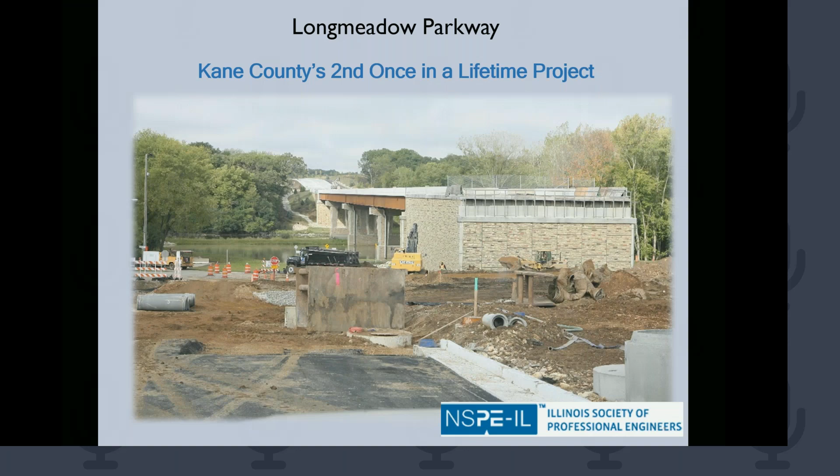Our topic today is Longmeadow Parkway, Kane County's second once-in-a-lifetime project.

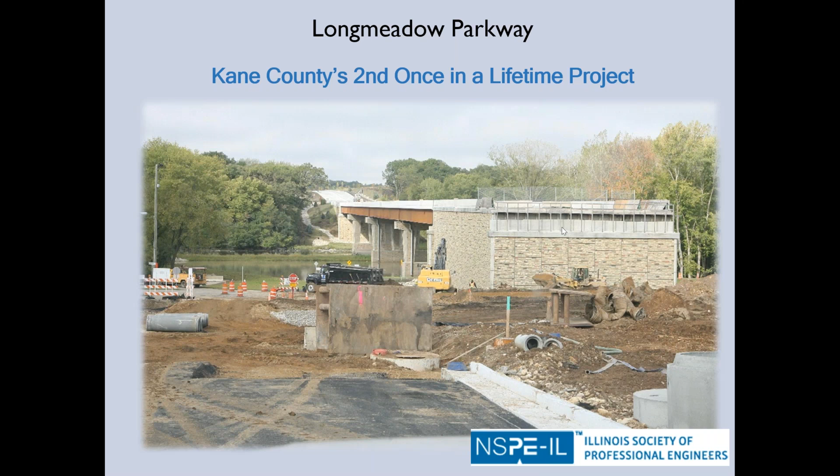Uh-oh. There we go. So this handsome gentleman that you're looking at here, oops, wow, who looks like he's running for president, is me.

I have about 35 years of professional experience, the last 24 of which has been at Kane County. And I've been in a leadership role at Kane County since about 2003. So in other words, I came in the middle of the Longmeadow Parkway project, sort of a relative newcomer.

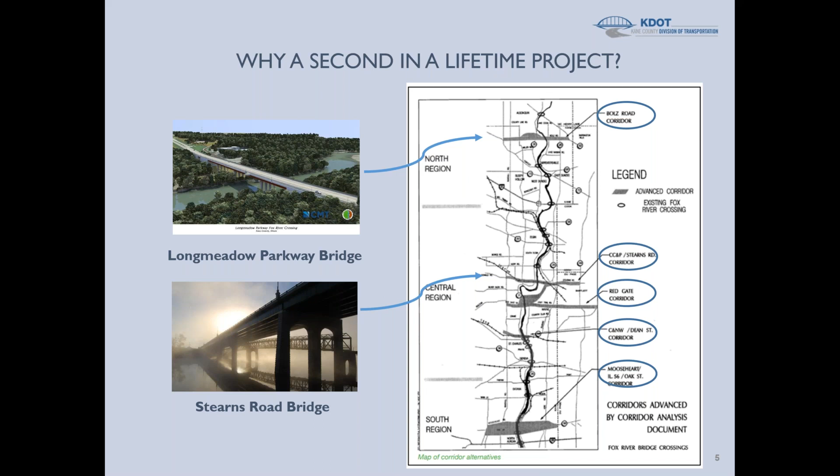As far as the 3 that surfaced out of the EIS, Kane County took the lead on 2 of the corridors, and that's Longmeadow Parkway and Stearns. The 3rd corridor was the Route 56 Oak Street corridor in North Aurora. And since that was basically a realignment of a state highway, we decided not to take on that one at that time.

So jumping back to Stearns a little bit, our first once-in-a-lifetime project that opened to traffic in 2010. I trained all my friends and colleagues to call it the award-winning Stearns Road project. It was unique in several ways. One is just the size and the scope of it, but also that something like 2/3 of the footprint was set aside for open space and environmental mitigation. So it was a very green corridor, and hence the color of the bridge that we chose.

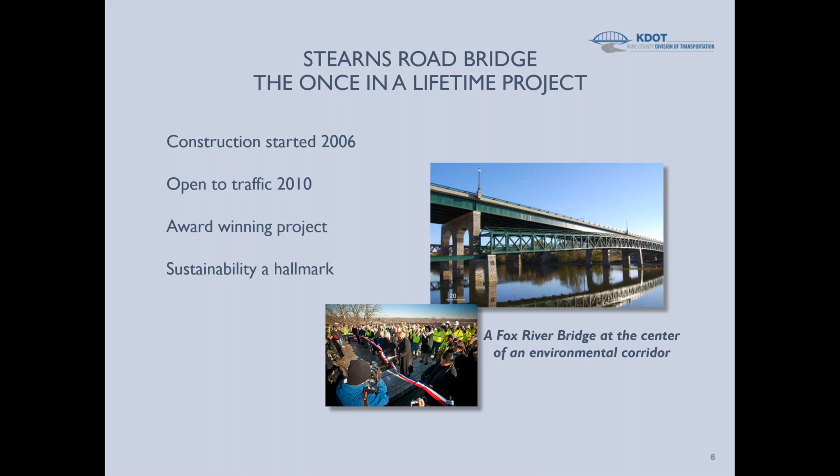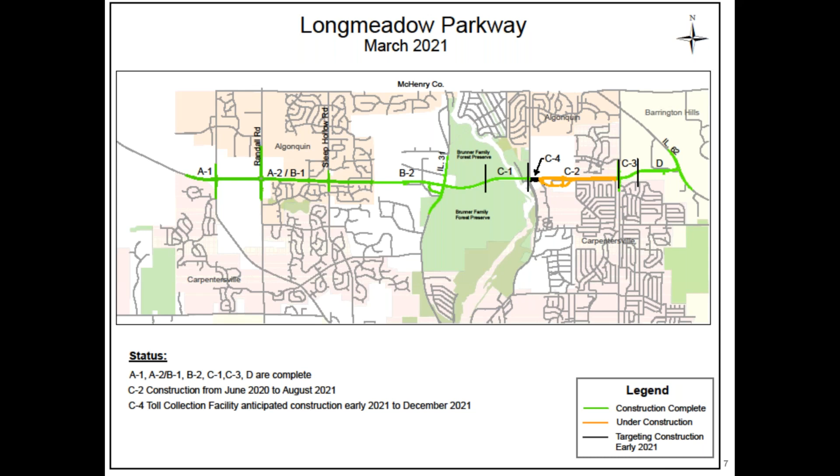All right, so back to Longmeadow Parkway. Here's a map of the entire corridor that I'll describe to you in a little bit more detail. Everything that you see in green is now complete, and everything that you see in orange is under construction. And then there's a small black piece there, item C4, which is the toll collection facility itself. So the gantries, the roadside equipment, and all of that infrastructure that's necessary to collect tolls will be the last piece that goes. That's actually been bid and awarded, and construction should start later this year. So we were advised to do that piece last because technology is changing, and so you want to take advantage of the latest technology.

So a little bit more detail about where we stand in the construction. In roughly 2016, we started construction on the far western edge of the corridor. That's what's labeled there as Section A1. We basically did that because the land acquisition was complete and we were able to move to construction. This is the only section of the corridor that we built as a 2-lane highway. The rest of the corridor moving east is 4-lane arterial with all turn lanes.

The reason that we built this as a smaller cross section is that this is largely open farm field actually, and just prime for development. It's right on the Randall Road corridor at the intersection with Longmeadow. And so our thought was that as development occurs there, it would be reasonable to expect a future developer to widen that highway to meet the direct needs of their development. So we built just a 2-lane section. The 2-lane connection is very important though, because it allows traffic coming from the west to connect easily into the corridor and just flow the next 5 miles or so across the river towards the east.

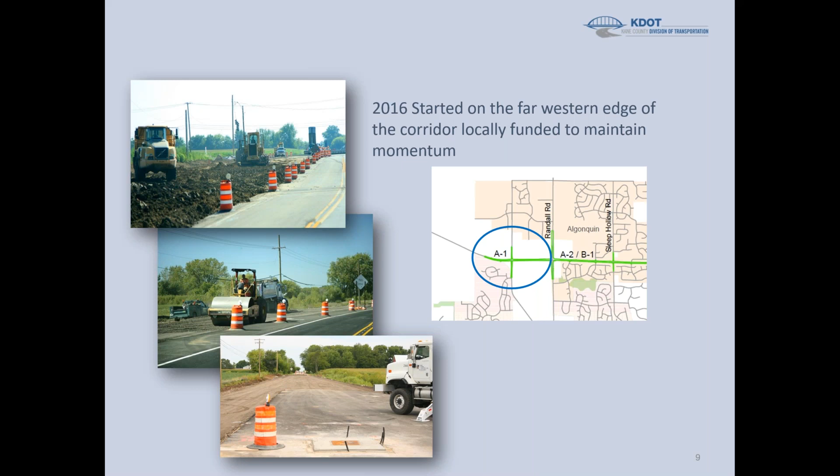So jumping forward, the next segment moving to the east, you see is labeled A2/B1. That one was built the following season, and in that area, the character of the land is mainly residential in nature. And this actually was sort of the heart of the organized opposition that I'll talk about later. But basically, people didn't want a new road in their backyard, and that was kind of the gist of the opposition. And then we just kind of started moving to the east.

Contract B2 there picks up where the other one left off and moves down the hill towards Illinois Route 31. And then contract C1, you see there, that's the section that actually includes the bridge over the Fox River. And that's largely complete, although it's not open to traffic because it really doesn't connect to anything on the east end of the project there.

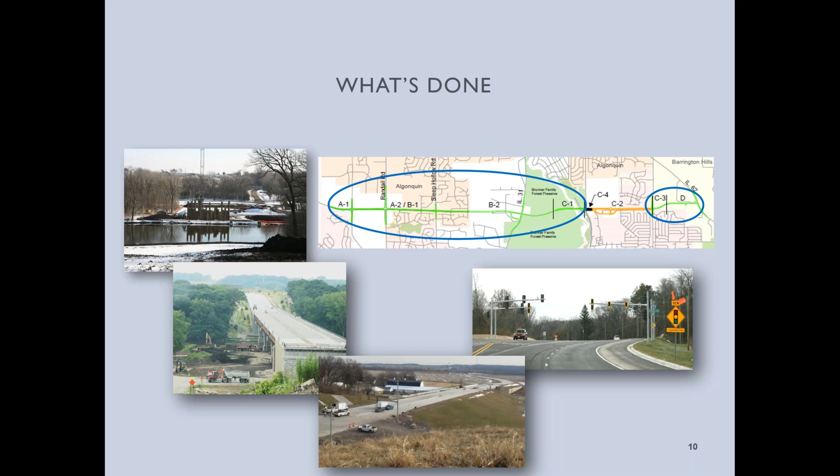And then on the far right-hand part of your screen, you see contract C3 and also contract D. Those connect into Illinois Route 62 on the east end of the corridor in the Barrington Hills area. The part that's under construction right now is contract C2. That one basically ties everything together.

You can see some of the local roads just sort of below and parallel to the corridor. That's the Bolz Road connector that allows local access. We tied in there with a roundabout. And contract C2 is in the area of an old quarry. So there are some complications there that I'll talk about a little bit later in the presentation. But it's moving along swiftly, and we hope to open everything sometime in 2022.

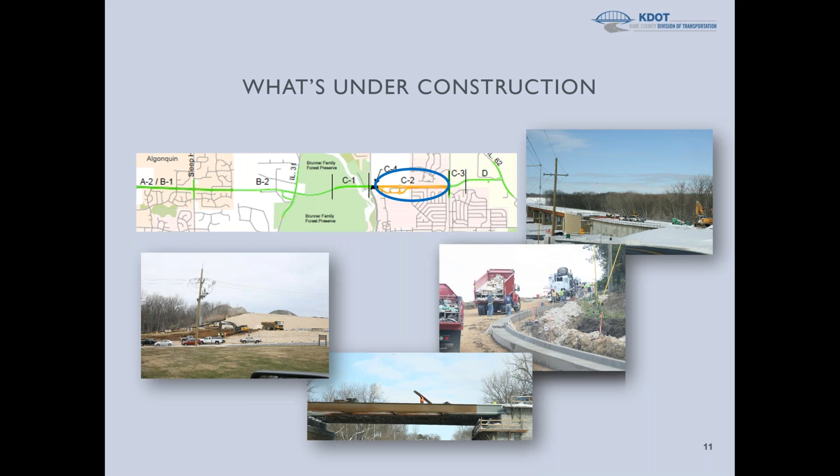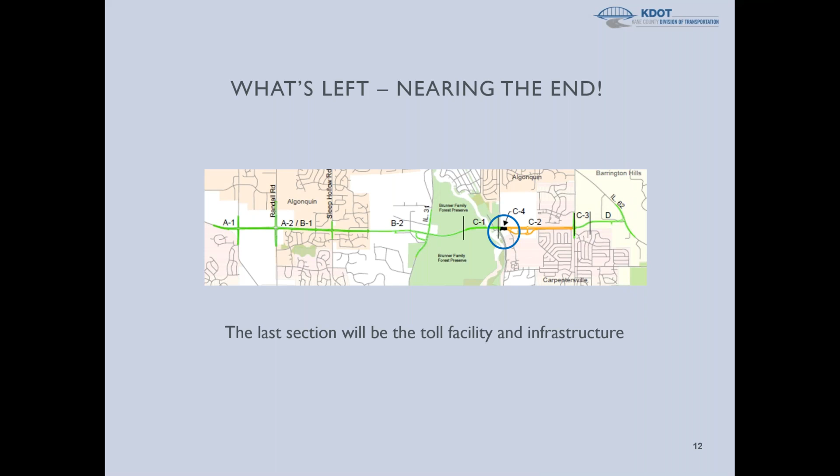And then, as I mentioned, the very last section is the toll facility itself that's let and awarded and should start construction in 2021. All right, so now I'm going to jump back and talk about the project development going back to about 1990 or so. That's when we started spending money on the project, but actually to understand it, you need to go back a little bit further in time.

This project had been identified as a need in municipal land use plans going back to the 1950s. And then you see there a specific reference in 1974, the village of Algonquin shows the Longmeadow Bridge Corridor more or less on the alignment that it ultimately took. So there's very specific reference to that as far back as 1974, but it had been identified in various municipal plans as early as 1950. You might want to remember that number as you start to take the quiz questions later.

So in 1990, I mentioned that there was a bridge advisory committee that was formed. This was local leaders, mayors, county officials, and it was sort of headed up by our influential congressman at the time. The idea was to look at all potential bridge crossings of the Fox River along basically the entire length of Kane County, between Algonquin on the north and Yorkville on the south. As I mentioned, that effort narrowed down the 20-some opportunities to 5 that were studied for potential river crossings, and those were conducted as part of one large environmental impact statement.

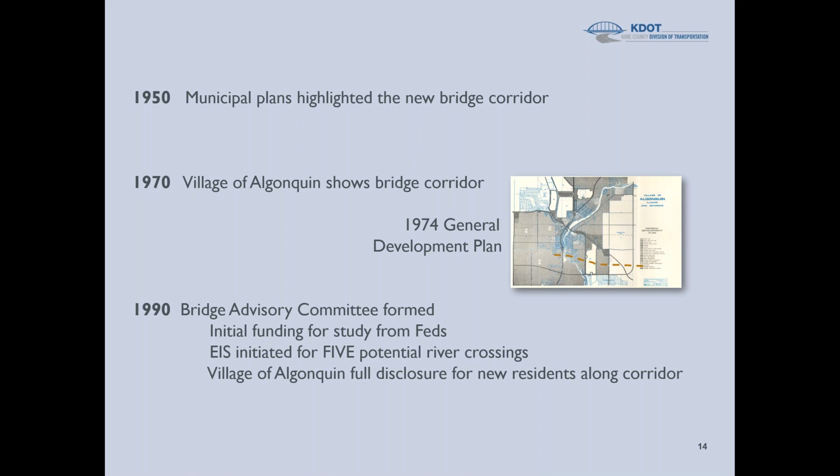Once the EIS was completed, and that was formally in 2002, in that decade of the 2000s we basically began the hard engineering in earnest. With all of the environmental hurdles cleared, we started phase 1 engineering on Stearns and Longmeadow Parkway, both. A significant amount of the initial funding for Stearns Road was actually an earmark out of the federal transportation bill. I'll talk about that a little bit later. That was a large earmark.

The earmark for Longmeadow, on the other hand, was small. It was $4 million. And when you consider a total price tag of over $100 million, it was just sort of some seed money. And so as we progressed the engineering and got closer to construction, this idea of tolling the bridge and trying to fund it that way began to take root. So I'll get into that as we move forward.

In a little bit more detail about what was happening then. So we submitted that draft EIS early in 2001 and got the final approval of that in 2002. As I mentioned, there were 3 corridors that came out of that large EIS effort as meeting the purpose and need, and Stearns and Longmeadow were the two that Kane County took the lead on. And that made them officially eligible for federal highway funding and for all of the remaining phases, including engineering, land acquisition, and construction.

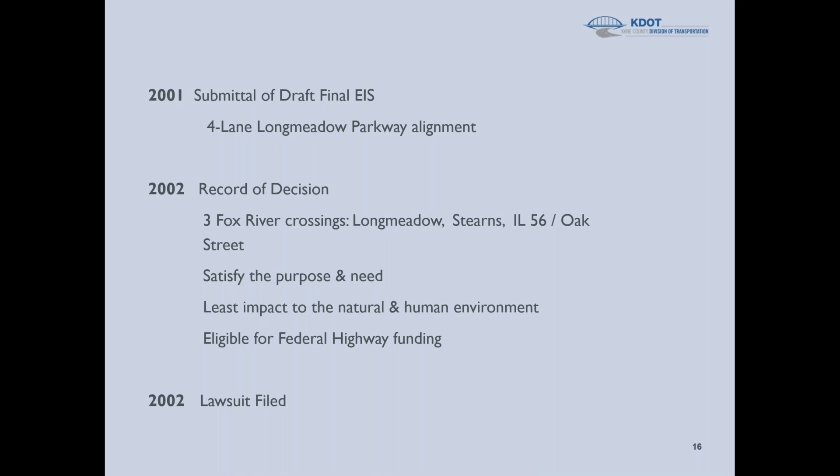Coincidentally, or maybe not, around the same time, there was a group of environmentalists, I guess you'd call them, who filed a lawsuit against Federal Highway, Kane County, and all of the federal agencies, basically saying that Longmeadow Parkway did not meet the National Environmental Policy Act, and they had a number of reasons why they thought that was the case. Ultimately, the Federal Highway Administration and the county prevailed, and that lawsuit was essentially thrown out.

So in the middle of that decade, in 2005, the federal transportation bill called SAFETEA-LU, don't ask me what that stands for anymore, but SAFETEA-LU was signed by President Bush, and we had a ceremonial signing of that document in the village of Montgomery at the Caterpillar plant. And so at that point in time, Stearns and Longmeadow had been progressing on a parallel track. Neither one was considered a priority over the other.

But as you can see, when the earmarks came out and Stearns got one of the largest federal earmarks ever, that one obviously became a more real project and began to progress faster than the Longmeadow Parkway did. So between that earmark in 2005 and 2010, we completed and opened Stearns Road to traffic. Meanwhile, Longmeadow, we're still trying to figure out how we're going to pay for the thing.

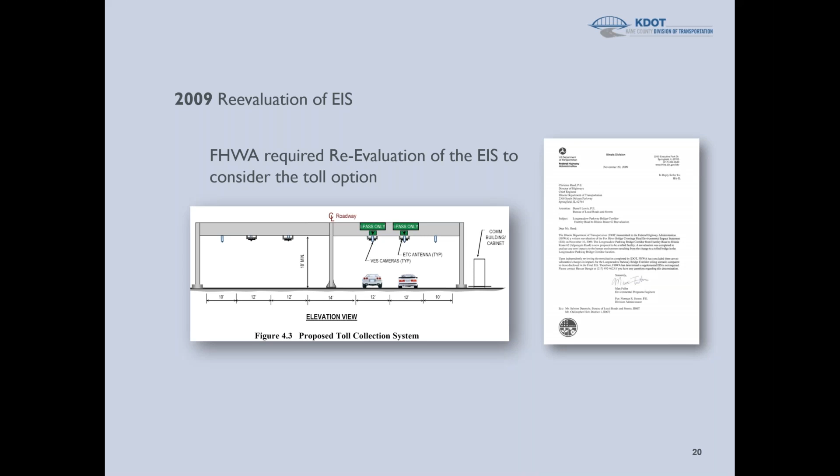All right, so we'll jump ahead to the next decade, 2010. I mentioned the reevaluation of the EIS. We had to update basically everything that was in the EIS, newer endangered species. And during this decade, also, the support from the area municipalities increased. But also there was sort of this vocal group of residents in the Algonquin area in particular that were the NIMBYs, to use a pejorative term. They didn't want a new road in their backyard, and they heard the word toll, and they were sort of envisioning something like the Illinois tollway.

Well, this is really more a local arterial road, and I think a lot of that opposition tended to go away after we started constructing, and they saw, oh, this is not as big of a deal as we thought it would be. Also, near the end of that decade, we sold bonds for the construction of the bridge, and the bonds are intended to be paid back by toll revenues.

Throughout, we started with that $4 million earmark, and we're trying to fund a project that will be, say, $160 million by the time we get done. So staff worked very hard at pursuing every opportunity that we could for federal dollars. Over time, through different ways, we were able to cobble together about $20 million of federal funds.

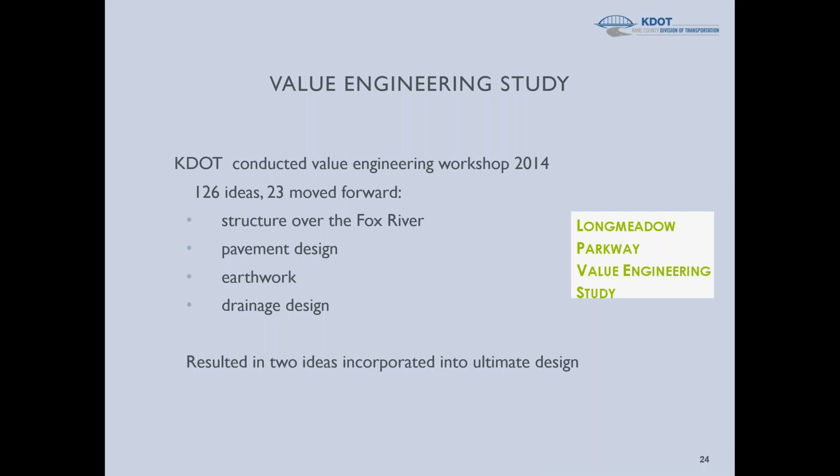So if you're familiar with the area, and you're probably not, but as you head from west to east, you're going down a large bluff towards the river valley. The phase one engineering actually contemplated a major cut section in this area, and I'm remembering cuts of up to 40 feet to try to bring that highway down to grade by the time you got to Route 31. So it's a huge earthwork moving job in this section of the corridor.

So a lot of that soil wasn't going to be able to be used elsewhere on the corridor. And even if it was, since the bridge isn't built yet, you would have to truck that around in long distances. And a lot of the cost of the earthwork related to that trucking cost. We were able to identify a nearby forest preserve sledding hill called Raging Buffalo, and the Forest Preserve was interested in improving their sled hill by adding soil to it.

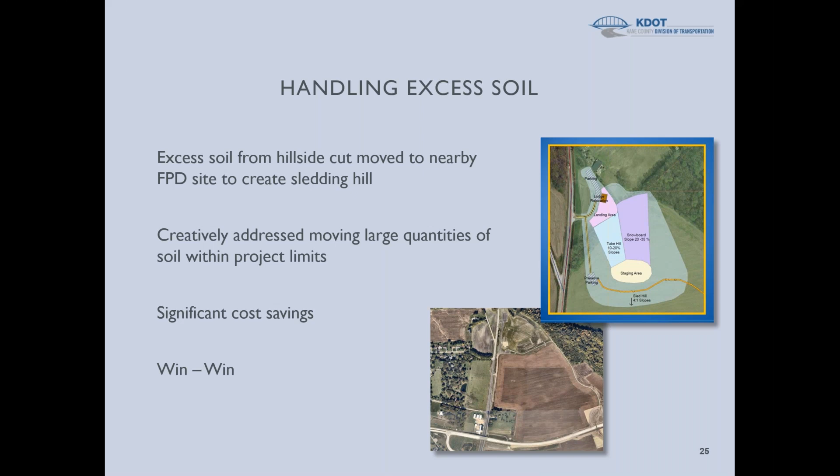So here we were with large quantities of excess soil, less than a mile from this facility. And we were also able to work out a haul road on Forest Preserve property. So we basically take that soil directly to the site without even impacting traffic on Route 31, for example. So it was a win-win. It saved us money. It improved the local recreational opportunities, and it's just something that we're proud of in terms of value added. This is one of the things that came out of that value engineering study.

In several places in the corridor, we introduced MSE walls, mechanically stabilized earth. The impact of that is essentially you don't have to build as much embankment, so the embankment costs are lower. Obviously, that's more than offset by the cost of the MSE wall, but the size of the footprint on the environment was enough of a value for us to consider and implement MSE walls in several places, at the main bridge and then at a few of the smaller bridges on the east side of the river.

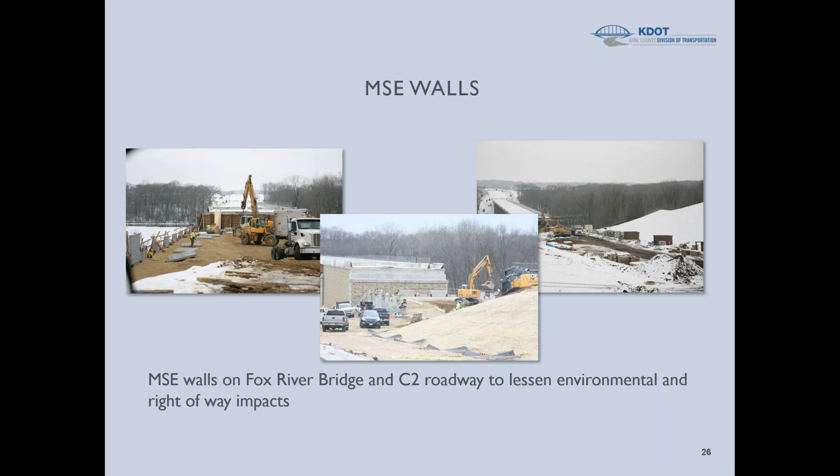Another key aspect that came out of that value engineering study is the Route 31 overpass. So the phase one engineering contemplated bringing Longmeadow Parkway all the way down to grade and having a traditional intersection at Route 31. And I mentioned that 40-foot cut that would be needed to do that. One of the ideas was don't try to get down to grade and just bring Longmeadow Parkway over Route 31 on a structure, on a bridge.

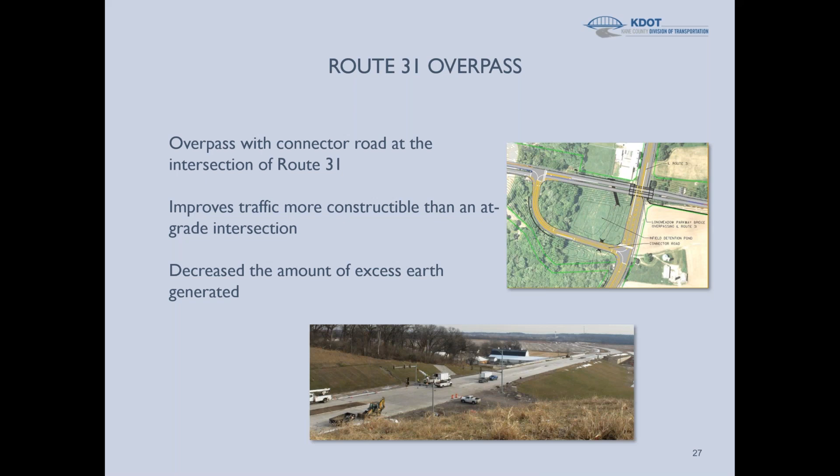And it seemed a little counterintuitive that building a bridge would actually be a cost-saving device, but the amount of excess earth excavation that we got rid of by doing that more than offset the cost of that structure. So that was another cool idea that came to fruition out of that value engineering study.

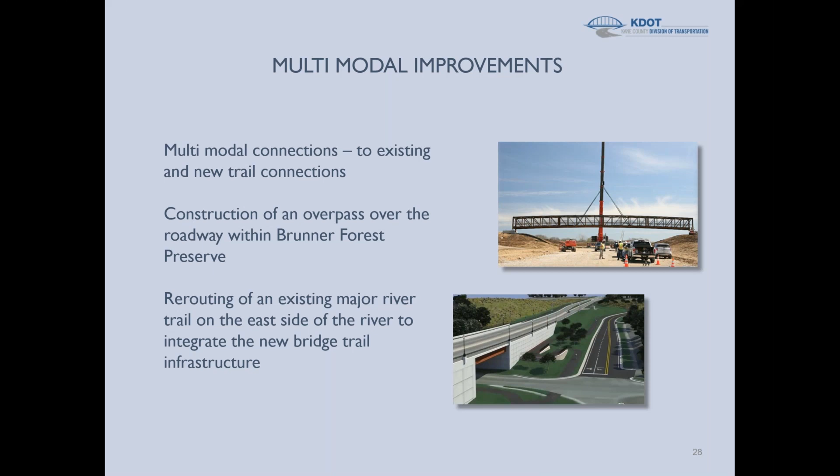You can see here some of the bike path improvements that we incorporated into the corridor. At the top, that's a bike path that is internal to the Brunner Forest Preserve, and the structure there will carry that path over Longmeadow Parkway. And this is just immediately west of the river, so you get some nice views of the river from up there. And then at the bottom is where we were able to reroute and integrate the Fox River Trail into our construction project and bring that underneath one of the structures that we were building on the east side of the river.

All right, I'll talk a little bit about some of the challenges that we had on this project. These are not necessarily engineering related, but just to give you a flavor of some of the exciting things that we saw along the corridor. I mentioned that we studied 5 regional bridge corridors, all as part of one environmental impact statement. So my advice to you is, if anybody ever says, hey, let's just study all 5 of these in one giant EIS, don't do it.

It overcomplicates everything. You know, we had to do public meetings in 3 different areas of the county. Anytime we wanted to do anything, we had to do it 3 times. So it sounded good on paper at first, but it just made everything exponentially more complicated. And so that's one of my takeaways: don't ever do a giant EIS from hell.

Oh, and I also mentioned that there was at least one corridor, the Redgate Bridge Corridor, that did not meet the purpose and need from this EIS, but actually ended up getting built as a smaller local bridge crossing in the city of St. Charles. So that was another interesting aspect.

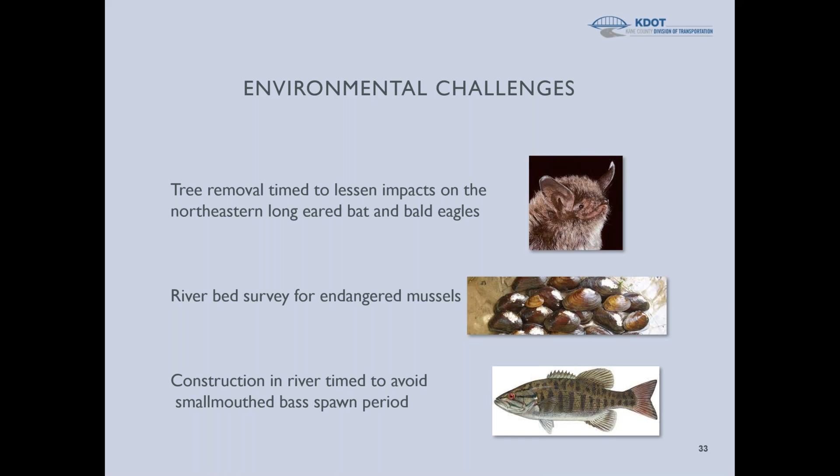Also, the judge that was originally hearing that case had unexpectedly passed away, and so there was a new judge assigned, and all of this happened sort of simultaneously. So the new judge came in, and I don't think she knew what to do right away, so she actually granted the temporary restraining order. So we're under construction. It's the middle of the summer. The weather's great, but we're banned from doing any work because of this temporary restraining order.

The good news, though, is that it was a short-term delay. The judge, after studying all the facts, lifted that TRO, and we were able to finish that project during the same construction season. Just had to push it right up until November. And then ultimately, that court case that I mentioned was dismissed.

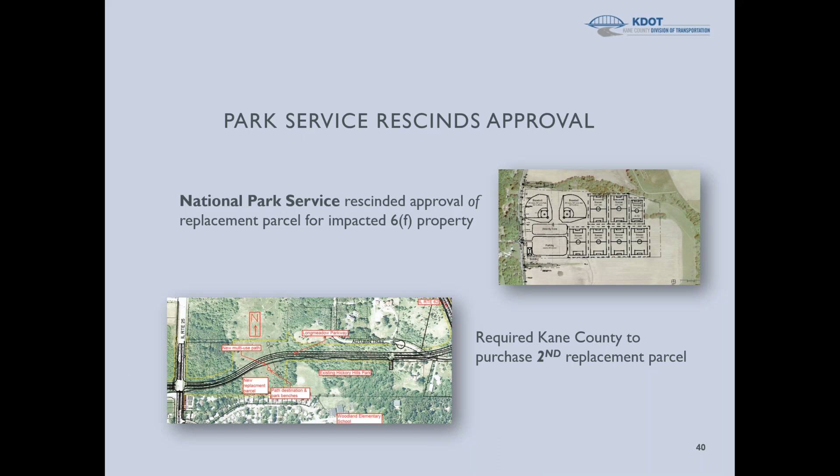All right, so the last topic I'm going to talk about here is tolling the bridge. This is an aspect that most local governments don't get to do as part of their projects, but I think in an era where earmarks are not going to be as common as they used to be, innovative funding solutions like this could be sort of the wave of the future.

So, as I mentioned, this contract C4 is the last one to go to construction. It's the bridge. This is where the toll collection facility will be. This is the gantries, the roadside equipment, and everything that's needed to capture the transponders and read license plates and all of that.

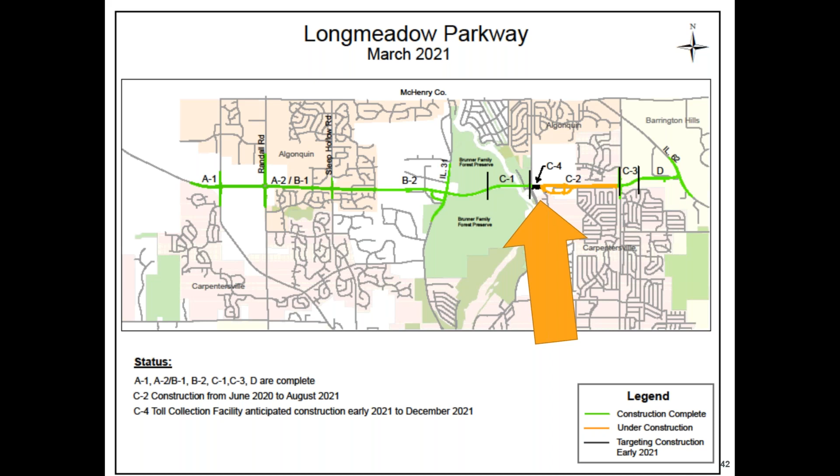We had some interesting opportunities. Obviously, if you're in the business long enough, you think you know everything, but if you've never run a tollway before, you probably don't. So we had to perform a formal traffic and revenue study. We also did an operations and maintenance study. Those were both things that were recommended to us.

And then prior to selling the bonds, we had to convince the rating agencies that we deserved a good bond rating. And what that does is basically lower the interest rate that you pay on those bonds. So we made a trip down to the Standard & Poor's office in Chicago and went over the county's finances. And as a result of that meeting, we attained a AA+ rating and pretty good rates on our bonds.

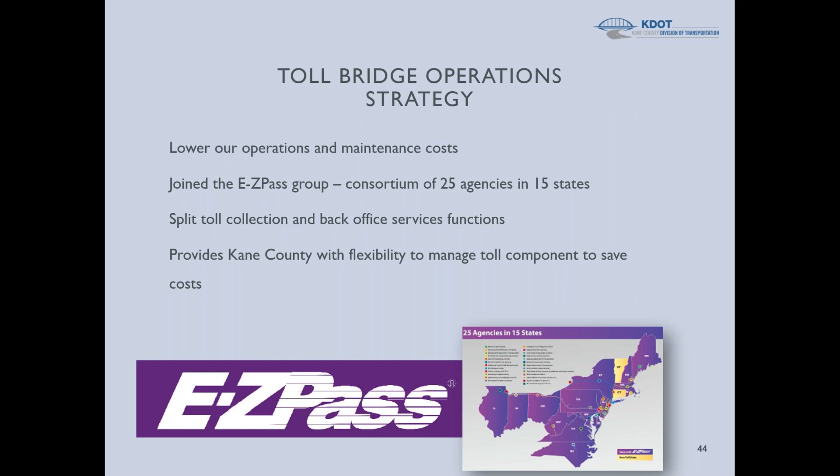Initially, we thought that we would have to be allied with the Illinois Tollway, and they would be our agent and would just charge us a certain fee for their services. But as time went on, the rules changed a little bit, and we were allowed to join the E-ZPass group, which is a consortium of toll agencies from Illinois all the way over to the East Coast. So our ability to join that group directly and take out the Illinois Tollway acting as our middleman, we believe saved us significant dollars.

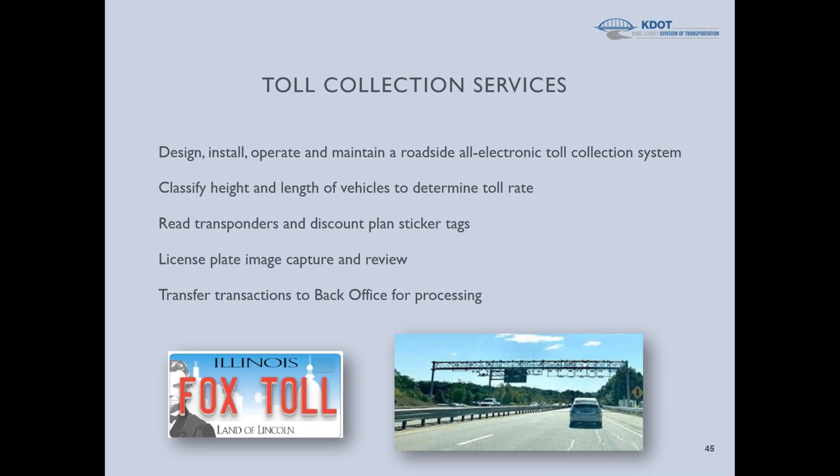We also issued a separate contract for back office services, and that was issued to ETC, which is a local firm. They do a lot of work with the Illinois Tollway, but basically that's the back end of things that you don't see, but it's everything necessary to keep the records and work with the customers to make sure that we're getting paid for those tolls that are crossing the bridge.

And then, as I mentioned, we're part of that E-ZPass group, so we basically have to, at the end of every month, reconcile if we owe money to another agency or vice versa. That all gets worked out as part of that E-ZPass arrangement.

So almost wrapping up, the moral of the story, this one has been going on for 30 years. So, you know, what I would highlight in particular is the municipal leadership. They really felt strongly about this project. And in many ways, it was a municipal project. It was that group of 9 municipalities that really wanted this to happen. I would say without that leadership, we wouldn't be doing this project.

And the county had the ability and the necessary statutes in place that allowed us to be sort of the lead agency. But I still say that it's a municipal-led project. In particular, a gentleman by the name of John Schmidt was the president of the village of Algonquin. He was really just a champion for the project and made sure that it was going to happen.